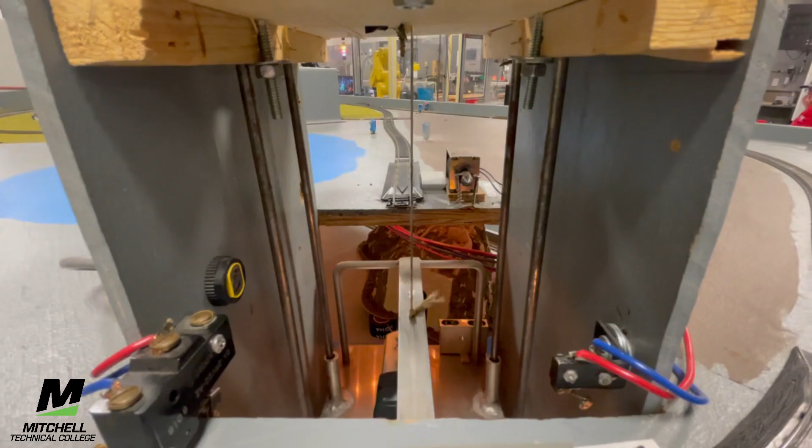Some of the goals for this project include programming the train to run on each part of the track, using an HMI to choose the train's path, and using various sensors to locate where the train is.

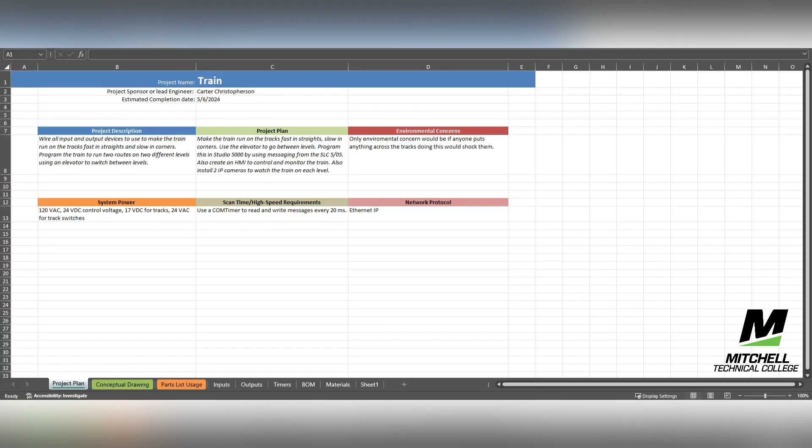Now I'll cover my project plan. This first page just shows off a quick description of this project as well as my plan.

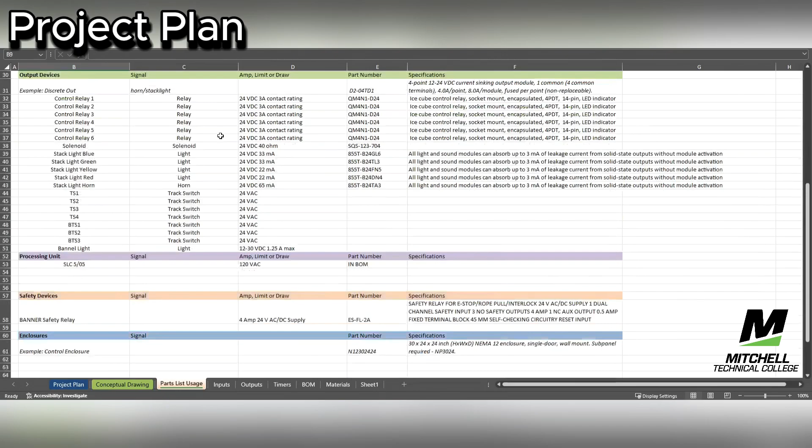This next tab is my parts list. This has the parts that I use as well as some specifications.

This next tab contains of my input devices. Here are my output devices. They are separated by VAC and VDC.

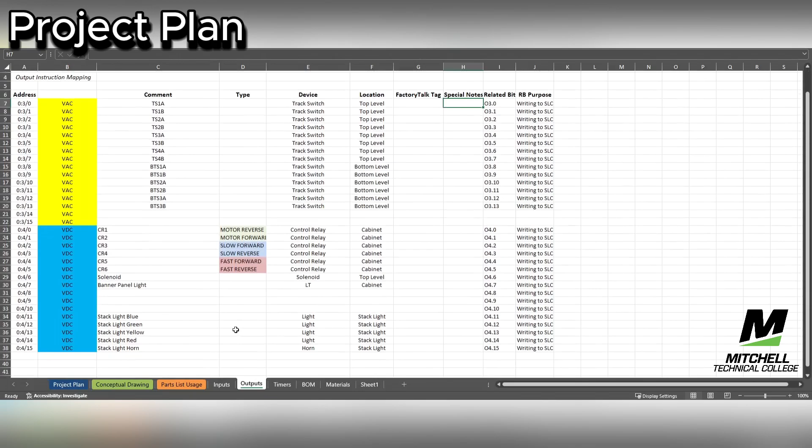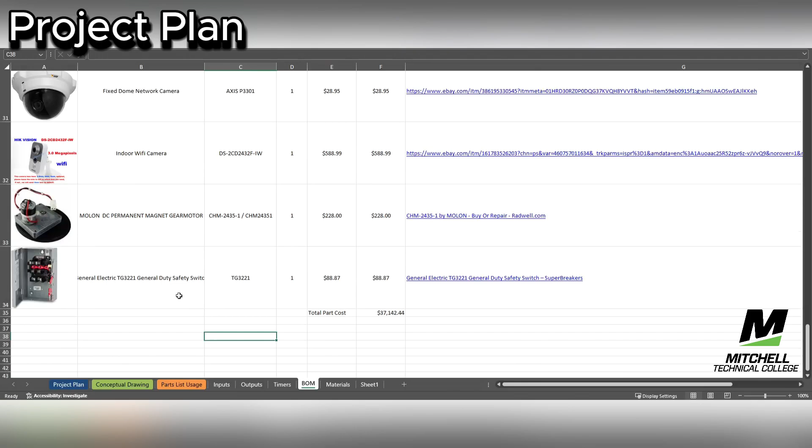Here is the bill of materials with a link to the part, and the total is just under $40,000.

Here's a quick little list of my materials with my wires and terminals.

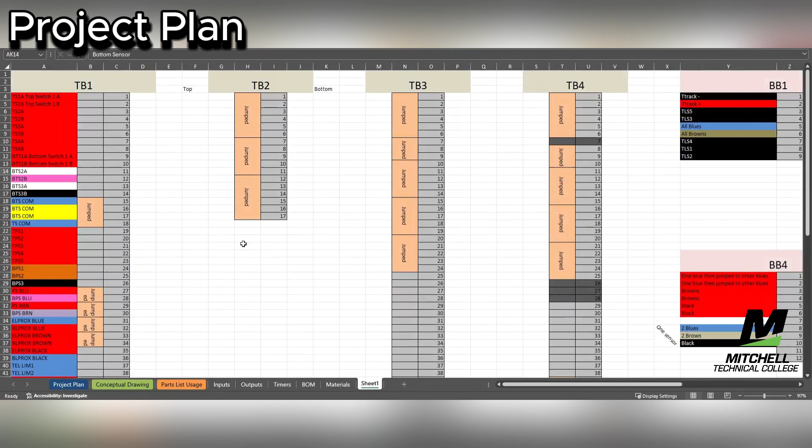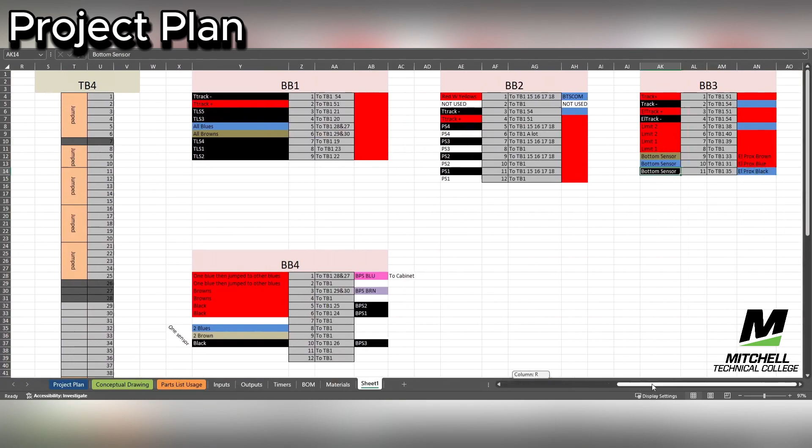Finally, this is the spreadsheet that I use to track where every single wire is terminated. This made it easier for me to understand where the wires are and what devices they are leading out to.

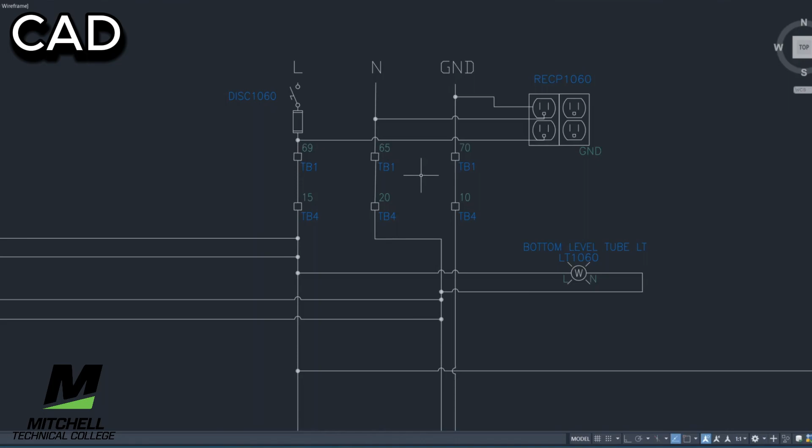It's also going into the tube lights that are lighting up the bottom level. This also feeds the SLC 500 and my 24 volt DC power supply. That power supply then powers the safety relay, the PoE switch, and the panel view.

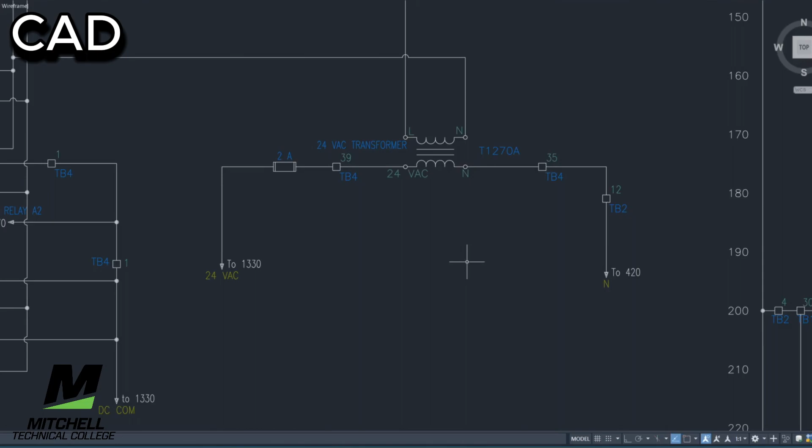Also feeding off of 120 is the 24 volt AC transformer, which feeds the track switches. Also feeding off of 120 is both of the transformers for the train tracks. Depending on which control relays are on will depend on if the train tracks will run in forward, reverse, or fast and slow.

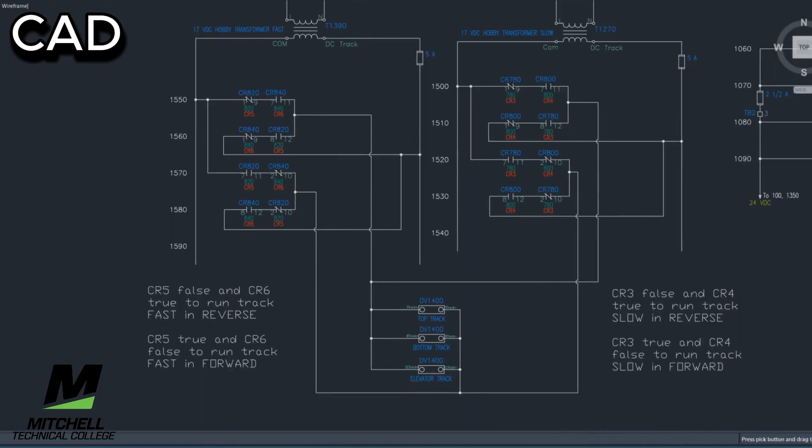Now I'll move on and show the safety relay. This is a standard safety relay with the dual contact e-stop and a push button to reset it. This safety relay is going to be used to cut power from both of the output cards. This will be able to stop any output devices from being activated.

Now I'll move on to the input card. On the top here is my first set of sensors. Only the receivers are going to the inputs and the senders are just getting powered.

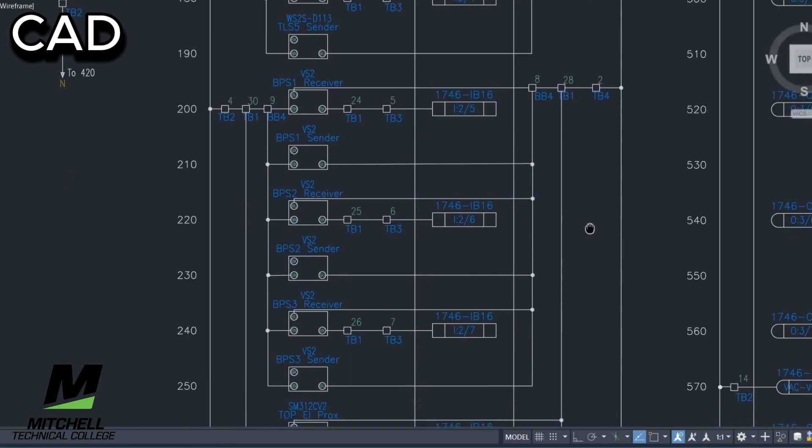Down here is the next set of sensors. These are wired the same, they're just a little different brand.

Now moving on, here are the elevator proximity sensors and how they're wired. Then below them are all the limit switches. Some are normally open, some are normally closed. And here the final input is used for safety.

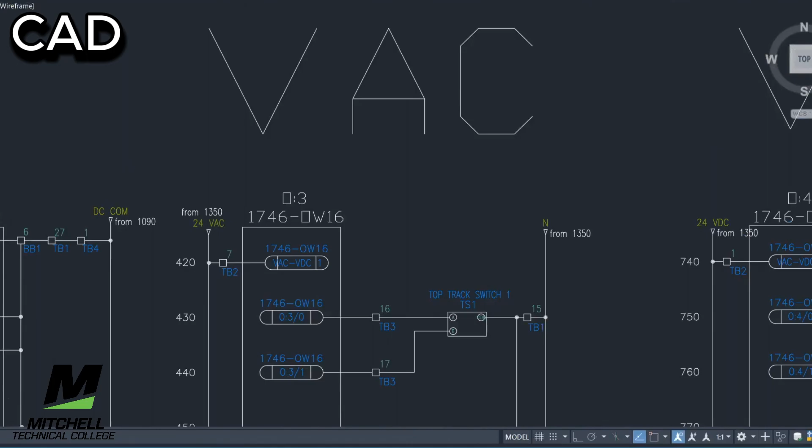Now moving on to the first output card. This is AC. This is where all of the track switches are, and they're all wired the exact same.

And moving on to the other output card, this one runs on 24 volts DC. It's got all the control relays.

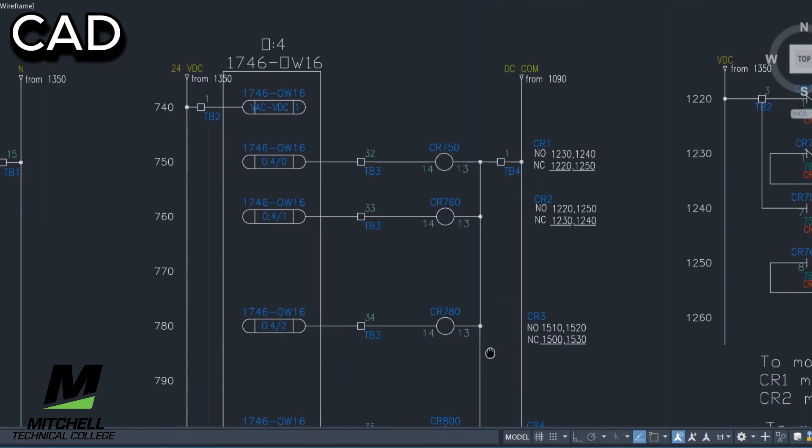And it's got a solenoid, the banner, panel light, and the stack light, which has got different colors, and the horn.

And finally, here's how the motor is getting controlled. This is being controlled by 2 relays.

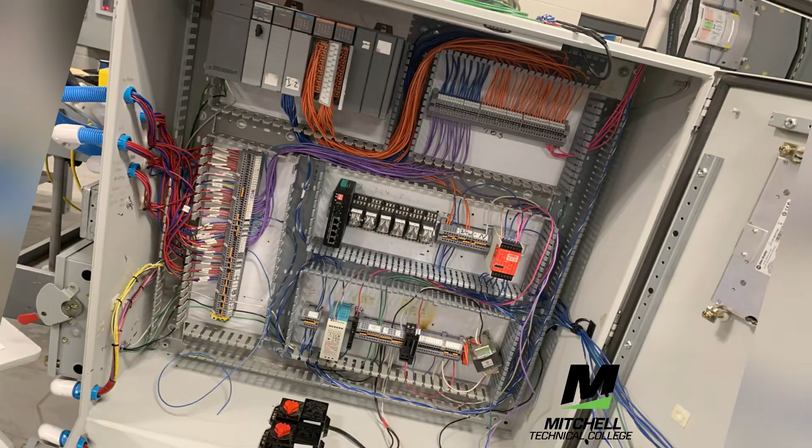Now I'll cover the operation for this project. To begin, you're going to want to log into one of the 3 users. For this demonstration, I'm going to log into Supervisor, as I'll have access to everything. More information about the users can be found in the user manual.

Once you log in, you'll have access to 3 displays: the train display, alarms page, and monitoring page, each of which will be able to get back to the home by clicking the home button.

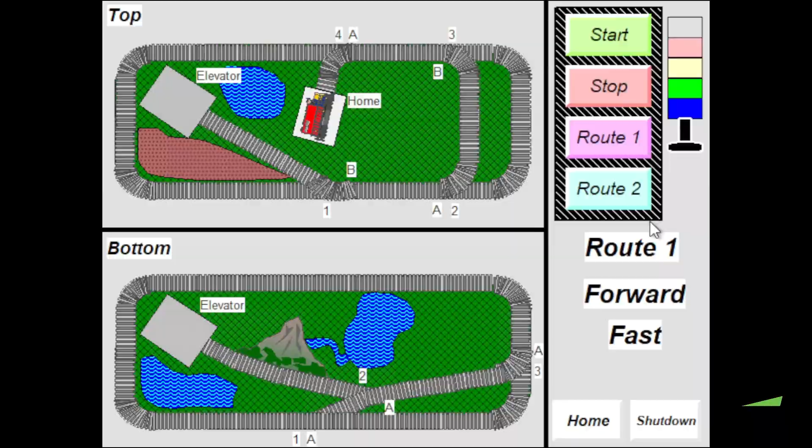To begin, I'm going to click Route 1 and click Start. This will start the train on running Route 1. The train will begin in the home base, and Route 1 will run on the outside track.

Once it hits the elevator, you can see on the monitoring page that the horn will sound, and you'll also be able to monitor everything else. Now once we run on the bottom, we'll run in reverse, and we will also run the outside since we're still on Route 1.

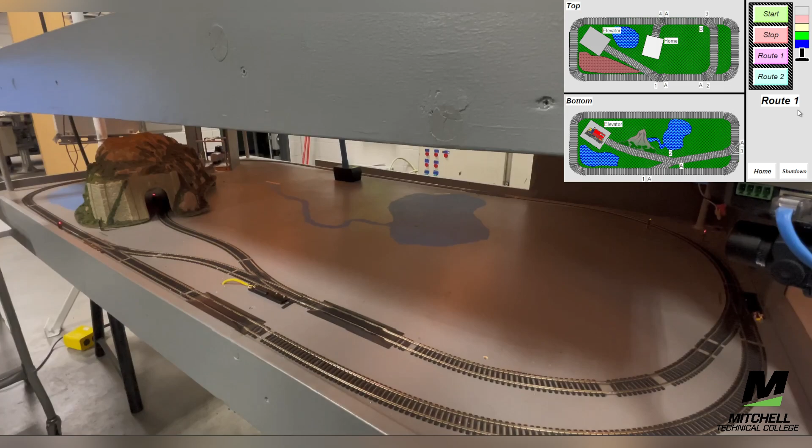Once the train drives back into the elevator and the elevator moves, you'll hear the horn sound again. In the monitoring page, you can view all of this. The train will now drive back into the home base and be ready to run another route. This time I'll run Route 2, which runs the inside track.

You can also see in the train display on the top right corner the stack light. This is the same stack light used in the monitoring page, and it can be used if the physical stack light is not visible.

The train display also shows all of the track switches and their current positions. These are labeled by either an A or B depending on which side is currently active. Finally, the train display shows which route is running, how fast the train is running, which direction it is going, and if the elevator is moving up or down.

Once the route is completed, the train will drive back into the home base. Now I'll simulate stopping. The train can be stopped at any time by pressing the stop button. After pressing the stop button, you must press the start button to make the train run again.

You'll also be able to change the train's route by clicking the other route that is not selected. You won't be able to change the route in all locations, since changing the route could cause a derail. To prevent this, the route buttons will disappear once you are in an area where changing the route would cause a derail.

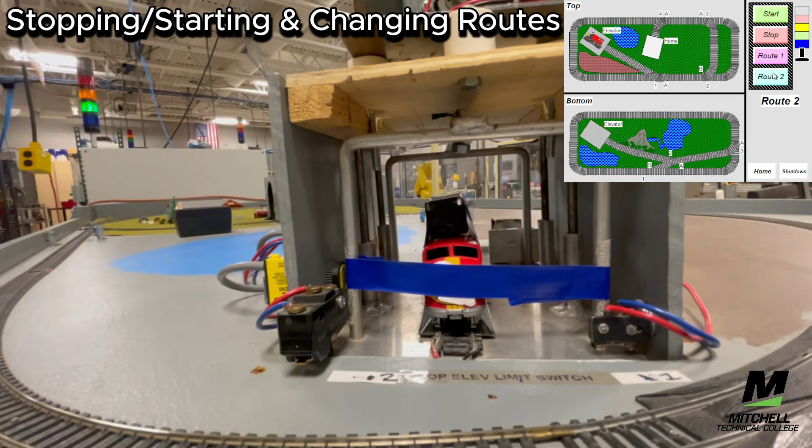Once the start button is pressed, it is programmed so that the train must complete one full trip before going to the elevator.

Now I'll demonstrate stopping the train on the bottom. You'll also be able to choose a different route while the train is on the bottom. Changing the route on the bottom will also change its return path once it reaches the top again.

Now I'll simulate an e-stop. I've clicked the e-stop button, a pop-up will show, and the train will stop in its position. You'll be able to close this pop-up and then go view this alarm in the alarms page. Here you can acknowledge it, acknowledge all, or clear all.

Once an e-stop has happened, the operator must take the train off of the tracks. If the elevator is at the bottom, it must first be manually brought back to the top by using the two buttons in the monitoring page. Then the train must be returned back to the home base, and then you can start once again.

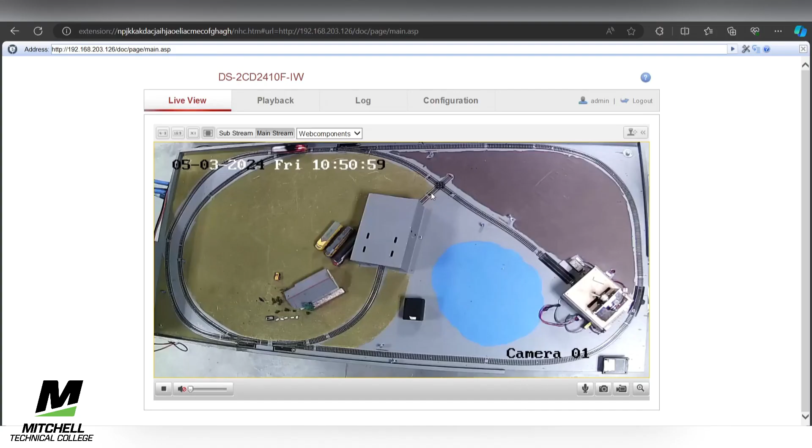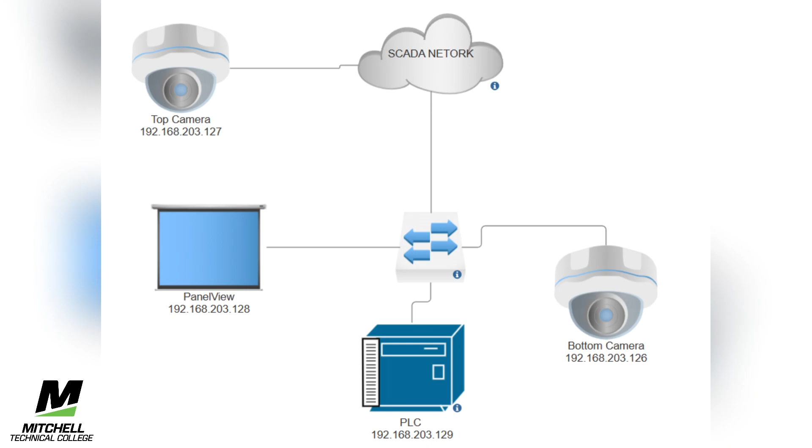The final page of this manual consists of the IP cameras and their logins. Here is a view of the top camera, which can be accessed through its web page. Both of the cameras are PoE. Here is the bottom camera, which can also be accessed just by typing its IP into the search bar. And here is a network map consisting of all my devices and their IPs.

Now I will cover my programs. This is my RS Logix 500 program, which is communicating with my SLC 5/05 in my cabinet. This program is used just for messaging, as it allows the CompactLogix in our classroom to read the SLC's inputs and write to the SLC's outputs.

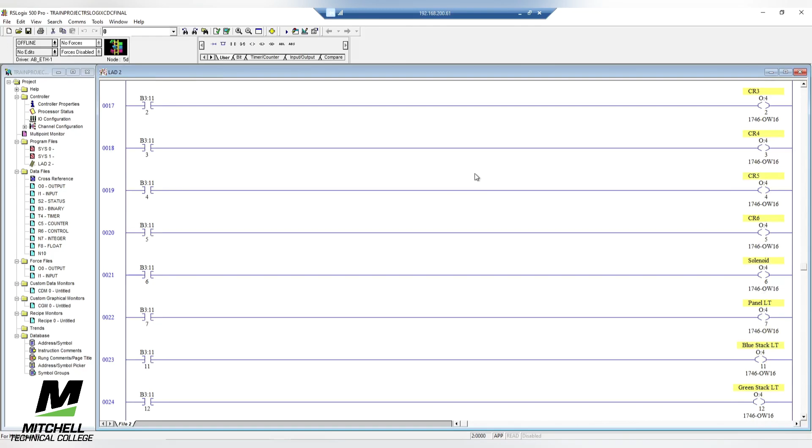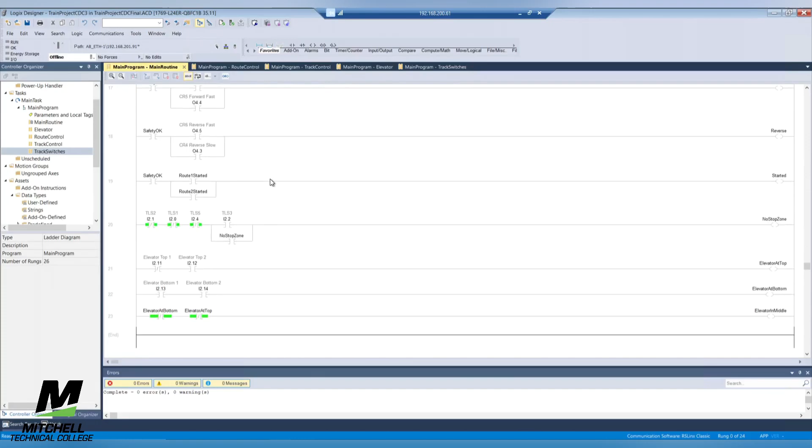Now I'll cover my program made in Studio 5000. This first routine consists of the messaging between the SLC and the CompactLogix. It also contains the jump to other subroutines and other logic used just for bits within the HMI. This next routine is the route control routine, which consists of the logic for selecting a route and starting that route.

This also consists of the timers that turn on the track switches for only a short amount of time. This next one is the track control routine, which is all of the logic for running the tracks in fast or slow, and forward and reverse.

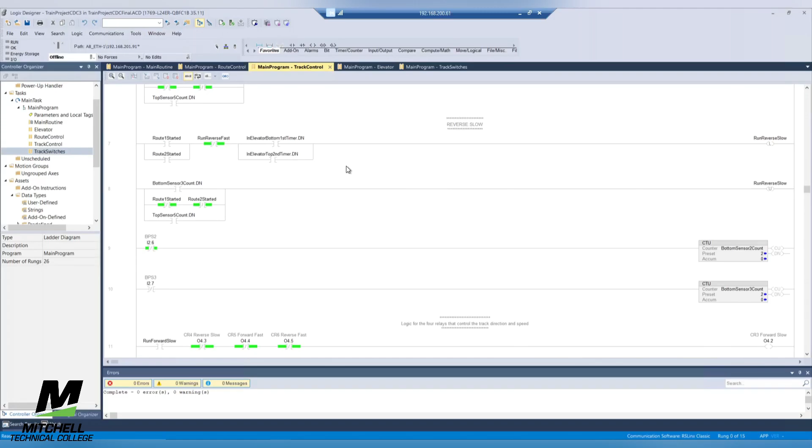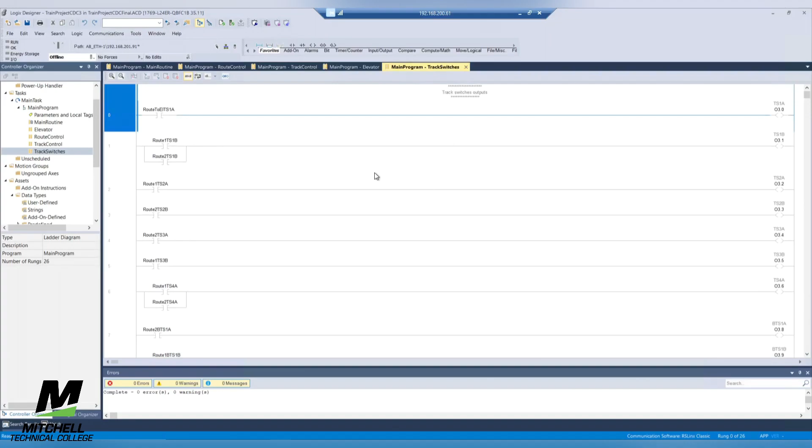The next routine is all of the logic for the elevator. This logic relies heavily on a counter that counts how many times the train has gone into the elevator, and by using that count we can tell where the elevator is and what should be going. The final subroutine for this project is all of the track outputs and also all of the HMI bits for telling which track is currently activated.